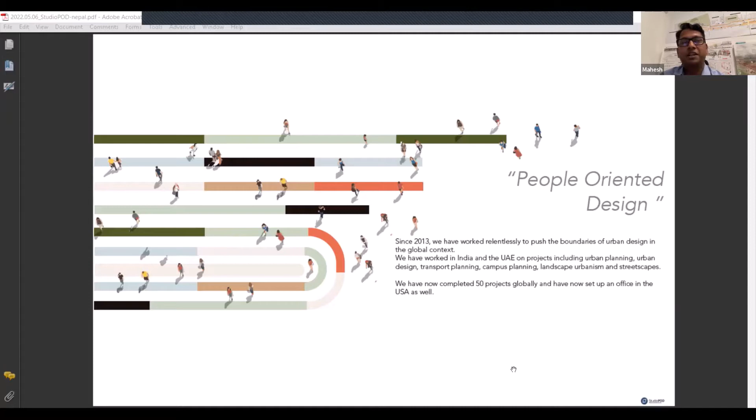We talked about the Western kind of culture of how placemaking and public spaces are being turned around. Specifically for us, like StudioPOD, we call ourselves people-oriented design, that's what POD stands for, and our story has been quite interesting. We are an urban design and planning practice based in Mumbai, and now with an office in the US as well. Our journey has been a learning experience, because all three of us, Sarfaraz, myself, and Mansi, did our masters in the US. We spent 5 to 7 years there, looking at all the stuff Ethan was talking about in terms of New York, the Broadway example, how the entire space transformed over the years.

We've seen that as well. And what Tina was talking about, the child-friendly spaces, a very interesting perspective from what we've seen in the last few years of practice. And what Dr. Sangeeta has been talking about so aptly, in terms of nature-friendly cities. There's also something about looking at history that could really support our understanding of cities, especially in the Asian context.

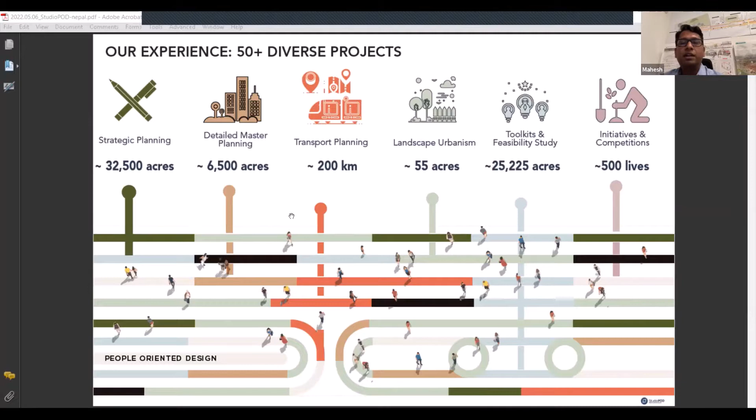So when we started our practice, we had to take everything we were doing and saw in the West, and actually contextualize a lot of our understanding, coming back and seeing the entire experience of looking at different kinds of projects. The idea was to look at the overall perspective from different angles. We went through the whole journey by looking at a lot of planning and master planning exercises, whether old historic towns, temple towns in northern India, villages, and looked at a lot of these city-level interventions that were happening, taking ideas from these different perspectives.

In the last few years, it's been an interesting journey of looking at actual implementation of some of these placemaking initiatives, whether at a large landscape scale integrating with the built form and cities, or actual streetscapes and projects within the cities.

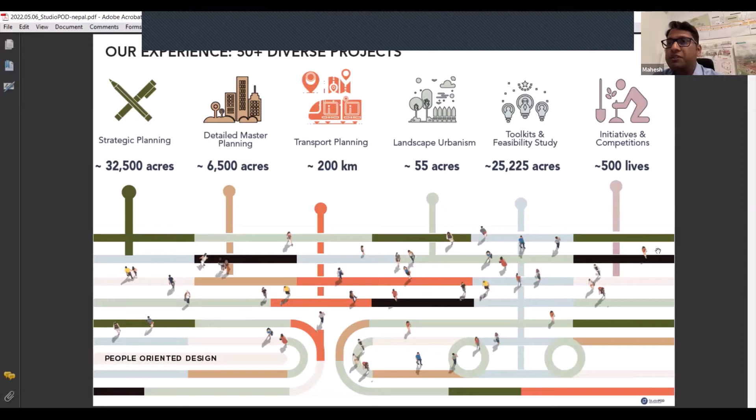So we're going to talk about three interesting projects, each one of us will quickly go through one of them. The first one is Worli Connect. Essentially being a consultancy firm working in the public realm and planning sector, these three projects: one of them is a self-led initiative working with the local municipal corporation. The second one is an appointed project which we took up as an exercise, which Sarfaraz will talk about. The third one is a very different public-private initiative, which Mansi will talk about, the one being mine.

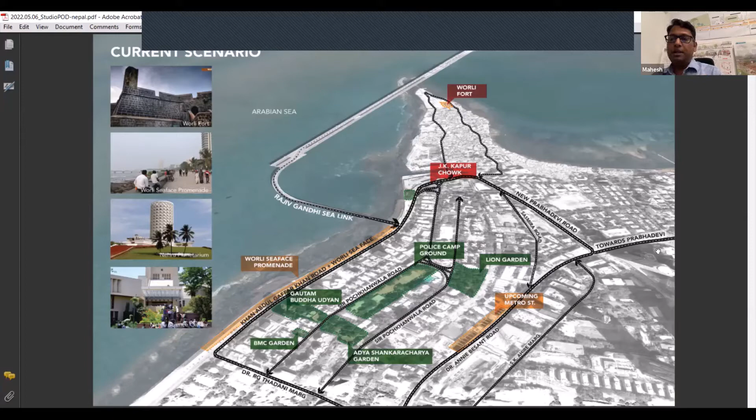To begin with, Worli Connect: when we were working on one of the projects in the city, the municipal authorities called us to just look at one street and public art on that street, for the pedestrian alleyway leading to the coast of Mumbai. When we went and walked around there, we saw so much potential, because that one alleyway was actually part of a larger network within this particular neighborhood. It connected different parks within the neighborhood, and at a larger system level, connected a transit station, an upcoming metro on one side, and the coastline, the sea face promenade, on the other.

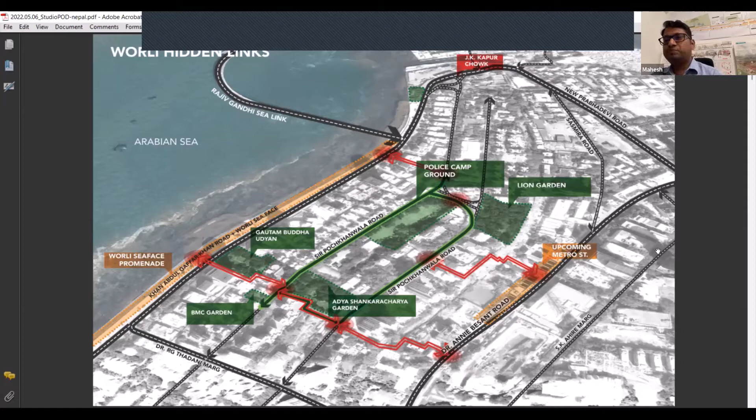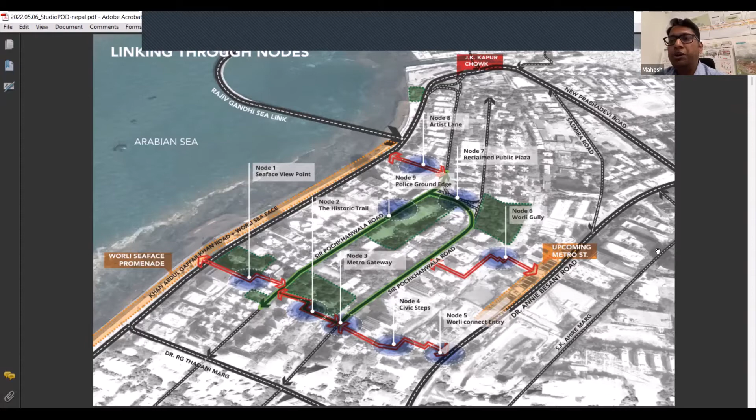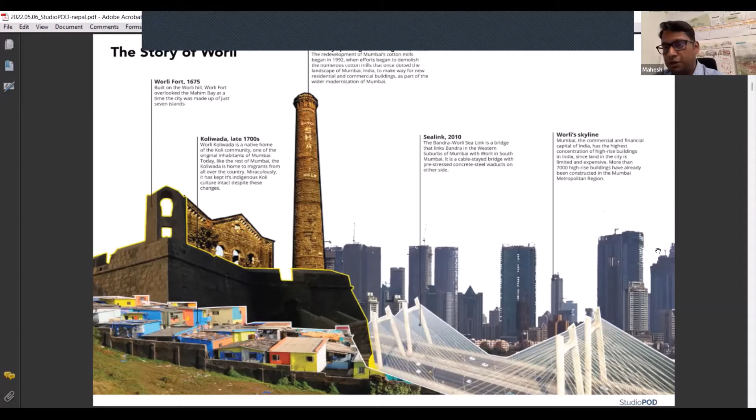So what we really did was look holistically at how to connect all these links together, through a series of fun, loving initiatives of upgrading these public spaces, which were boring pedestrian alleyways, unsafe in a way because of a lot of dark spaces, and how to recreate and use them as public spaces. The idea was to look at the entire neighborhood of Worli, from the historic old fort areas, the transitional mill spaces being redeveloped within the city as new urban parks or corporate parks, and then the future of the place itself.

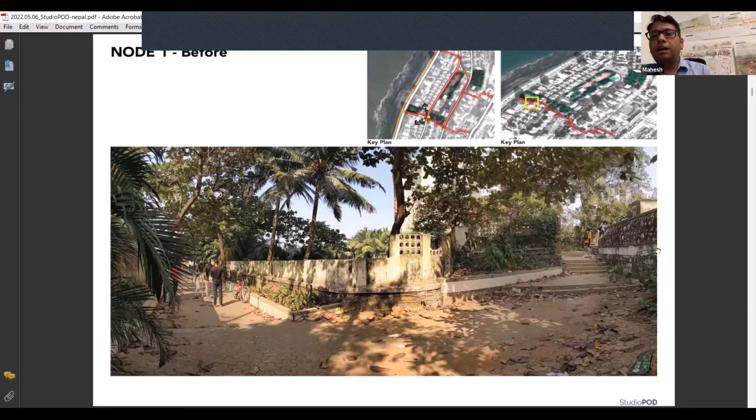Some of these initiatives are still under construction. This basically talks about how you take this one connector and transform it from different perspectives, opening up the wall which opens up the park, and how you look at it as a vision exercise of how to transform these spaces.

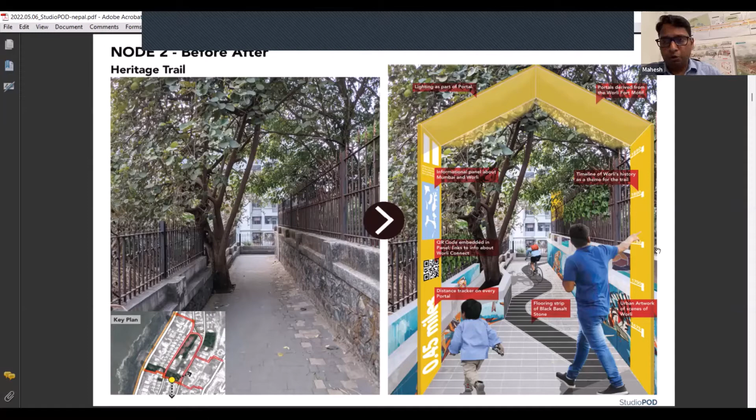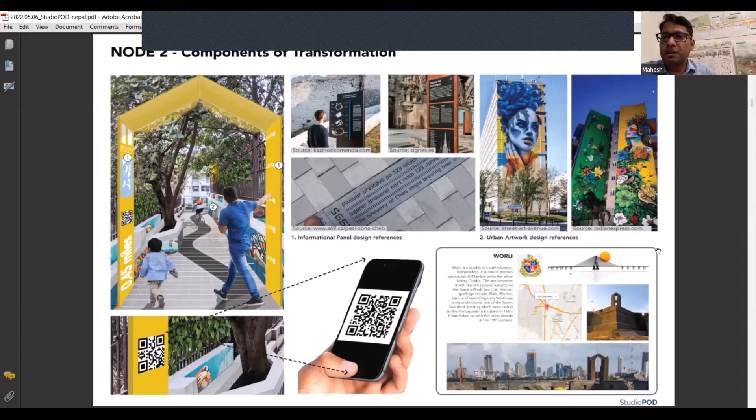Again, talking about the history of the place, and how the entire experience would be much more fun with kids walking through these spaces, introducing play elements along the way, plus wayfinding and signage that could capture local context and history. This was a different exercise for us, because we went in and just showed them the possibility of what could be done.

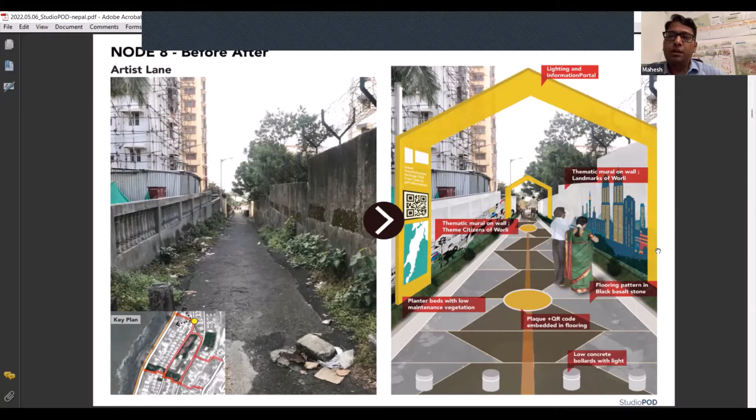It was intensive enough that the corporation authorities told us, okay, let's just try one and see how the transformation happens. We were able to implement one of these nodes, transforming a place that was dark at night into a fun way of introducing light and art, with people coming to interact with the artwork.

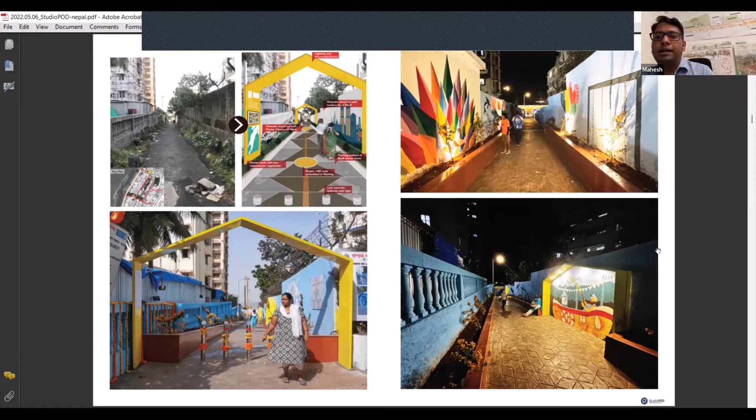The idea of this artwork was talking about the old historic Kolivada, the fishing community and their space. We actually got artists from the local fishing community to come in and do the entire wall art. This was already implemented in a very quick way.

So going to the next one, which Sarfraz can lead in. Then we had all these selfie points, which were very attractive for people of different walks of life. People just walking through would pause and reflect at some of these art points. It's been quite a success, and now we're taking the same idea to different streets throughout the entire neighborhood.

So hey everyone, we'd also like to talk about similar ideas. The earlier version was a quick and dirty approach to transform a place into something lively with lights and color. Whereas there are some projects we were invited to do a mobility plan for walking and cycling.

That kind of traffic was quite a challenge in itself, and what we realized was there was hardly any space. Like all other cities in developing countries, there was hardly any space or thought given to how much space people need, where they'll walk from, how we can create that space. Our biggest win in this project was convincing the local authority through traffic modeling and simulations that we needed this entire lane converted into pedestrian infrastructure.

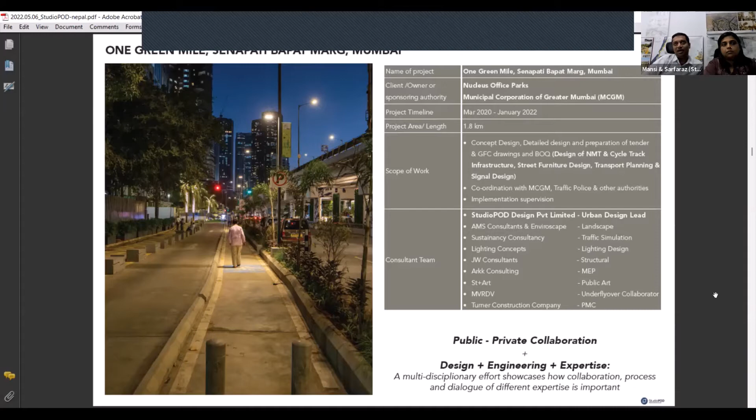So we partnered with them, went to the local communities, went to the local authority, and said let's collaborate on this in a truly PPP model. Several other consultants were appointed, the minister got super excited, and this led to a very interesting process of bringing several stakeholders onto the board.

One of the biggest vision statements that came out of our workshops was that these are not just for cars only — streets are spaces for people. Especially in Mumbai, where we have very little open space, we need more space that can do a lot of different things and multitask. So we went back to the board and asked how we can have an equitable distribution of right-of-way. Think about intersections, walking spaces, play spaces, and art and culture.

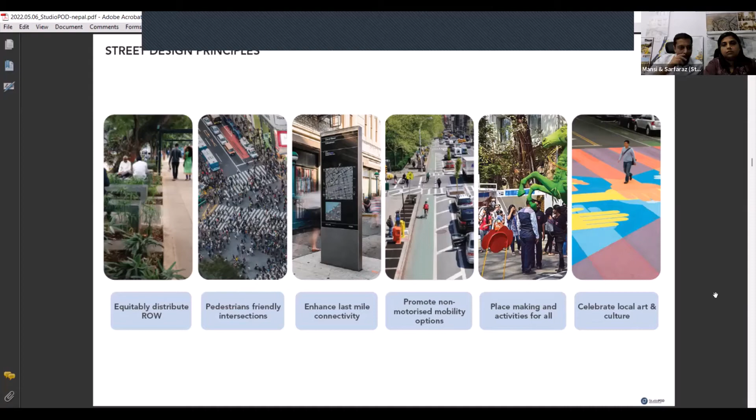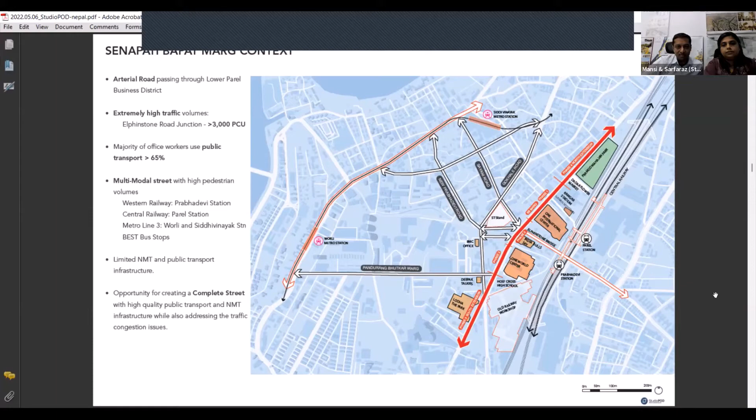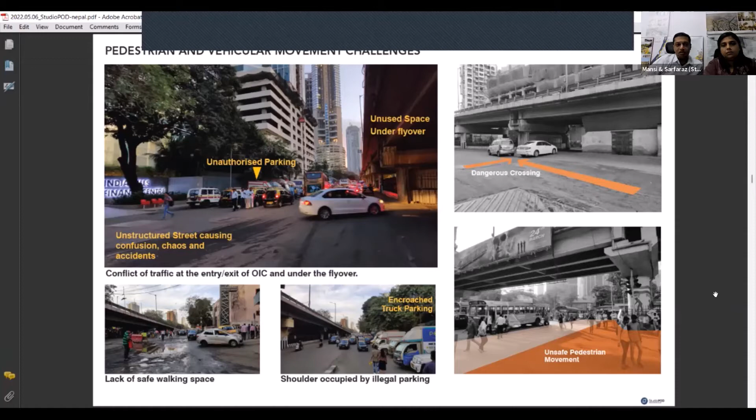Here's what the context looks like. Where it's written Senapati Bapat Marg, that's where the flyover is. So you have this flyover going on top, and these are pictures typical in every part of any developing and emerging economy. It's chaotic, occupied by parking, with no proper drainage and no proper place for walking. Pedestrians are all over because tempos and buses are parked illegally anywhere and everywhere.

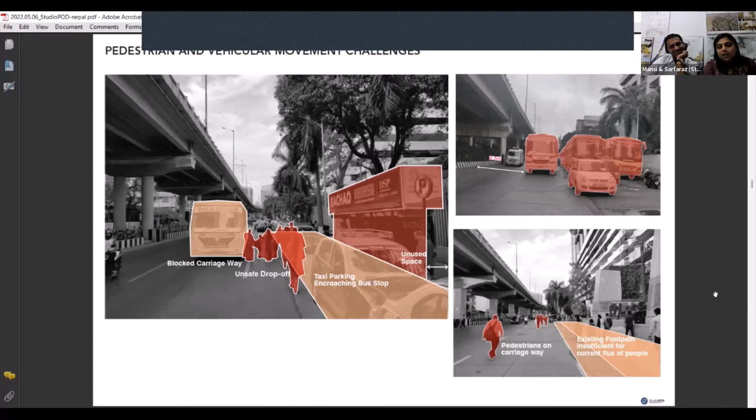At this point, our real challenge was how do we create a space where there is no space? Everyone told us we couldn't do anything here because there's no space, and if we made wider sidewalks, how would the cars go? So how would we create space?

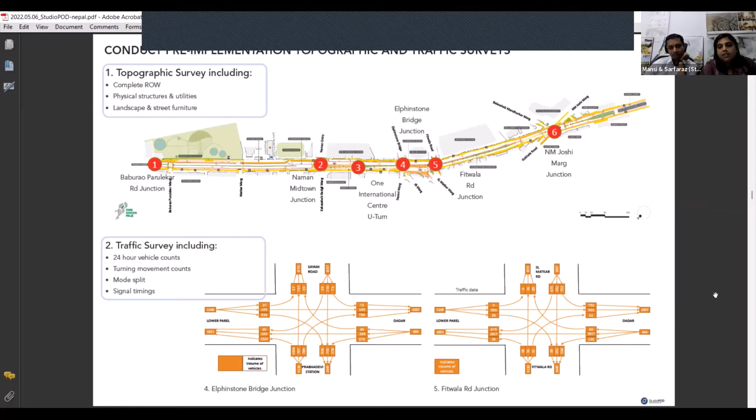We followed a technical as well as a placemaking approach to reclaim space and give it back to people. We did traffic surveys, traffic analysis, and topographic surveys to understand what sort of shoulder spaces were there.

Everybody was very nervous — the government, the client, the consultants — because this is a project in the heart of the city. If you're taking away two lanes from the cars, how are we going to justify all the traffic jams that would follow?

So we followed a mid-implementation process called tactical urbanism trials, where we already showed the vision of the entire design through temporary placeholders and paint, claiming the space and showing the government how it could work. Ultimately the final implementation was taken ahead.

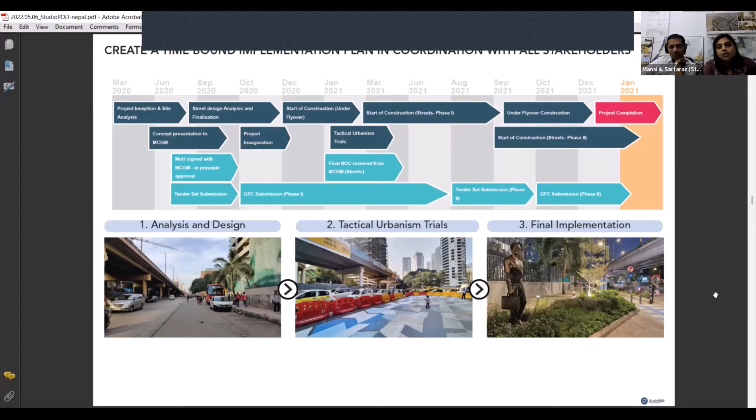It was a two-year process. It was not easy, and it was in the middle of the lockdown. Every time we went out with our masks on, we were going out just for this project.

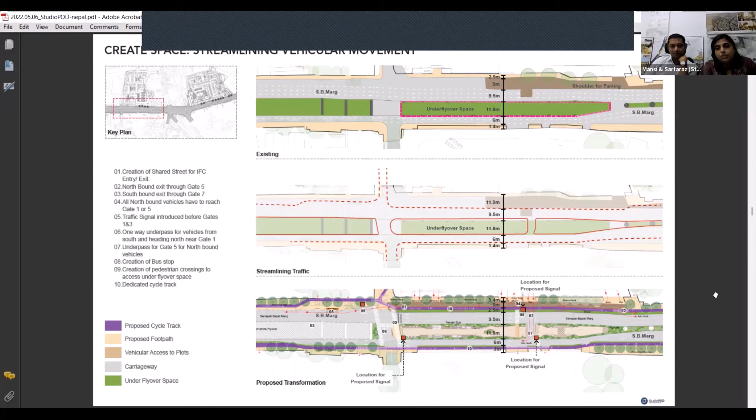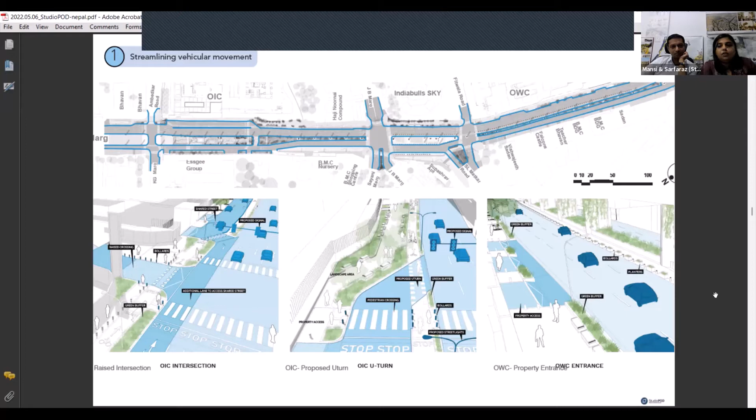These are different aspects — some basic principles so that all the stakeholders, the government, and the people living here were happy. We streamlined vehicular movement, created safe pedestrian crossings, and wherever we could, created islands and spaces for meeting where people can gather.

Benches were actually a struggle because people said if you put benches in front of our building, people will hang around there, and that's something we don't want — it could mean dangerous people would come and hang out. So we had to show them slowly and convince them how benches are a good thing.

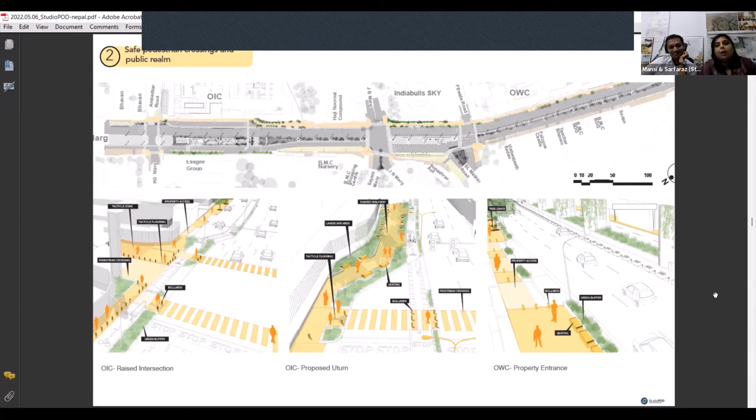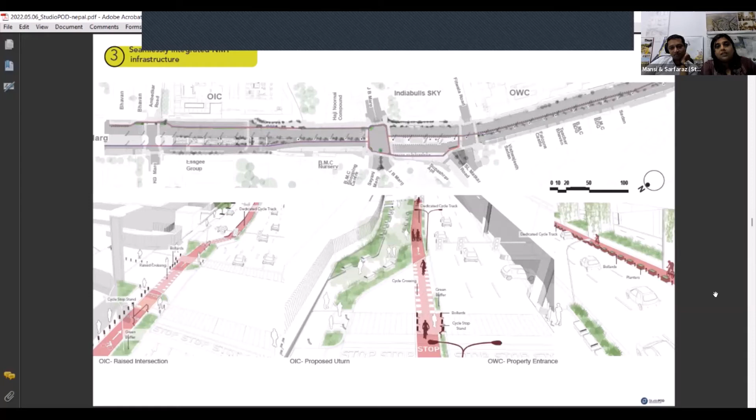Cycling is still being worked on, because the idea was to create a model street that included all different modes of transportation. Cycling was introduced as a network, and this one mile was going to be a pilot to test it out. In the final photographs, this is right now a multi-purpose area — not just used for cycling, but the idea is that the space is reclaimed and kept aside. Once the network is in place, we'll give the space back to cyclists completely dedicated.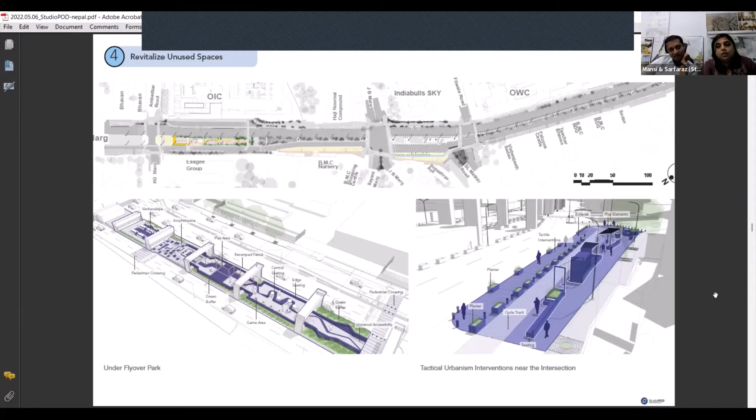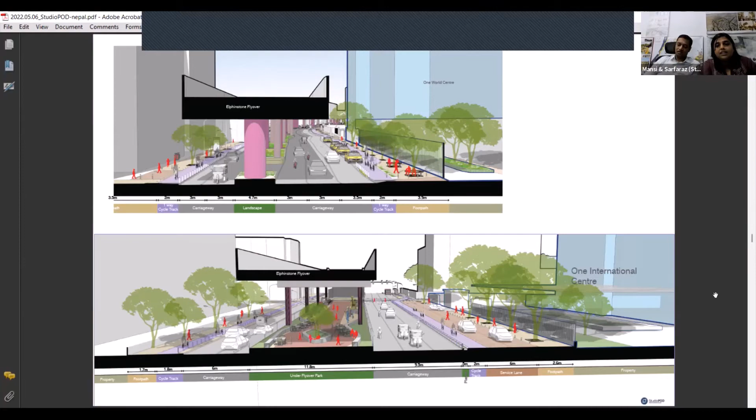A lot of under-flyover spaces were created because we love to fly above everything, all the reality, and we're left with these dead spaces in a city where we don't have enough open spaces or parks — in this case, one of the densest neighborhoods, where up to 5 people live in a room. So we started talking about how children, senior citizens, working professionals, and the local community can use these spaces through different times of day and different programs, integrating that into whatever space we've reclaimed to make it lively and come to life.

So the idea of making an equal street and a place, not just a space, was born. These were some of the initial renders that we did to sort of convince and get everybody on board.

During the day, since we had a full art consultant on board, we curated the artwork as well as the story that is by art, the signage, and everything sort of came into play.

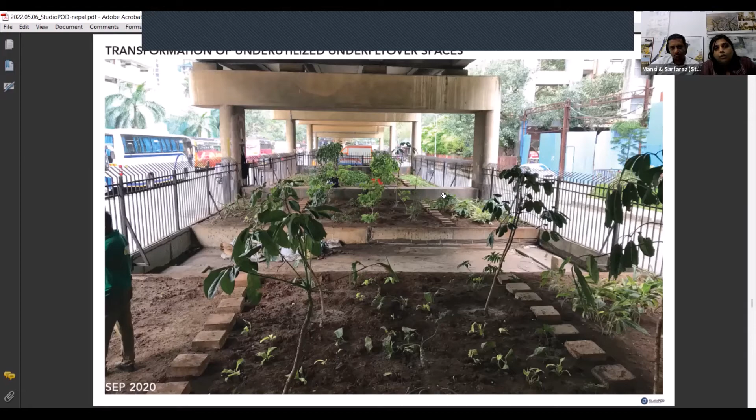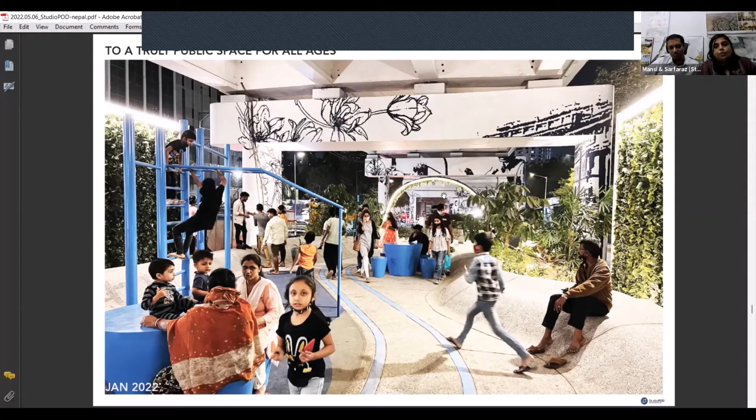What we did was we converted that into a space for the community to come together. It became a park, and lighting became an important piece. The good thing was it was actually raised by a meter, so while it was in the center of the road, when you go there, you do feel like you're a little aloof from everything else.

We had play areas, and today it's completely taken over by kids, taken over by different age groups of people who come and chill here, play board games. There was a Zumba class here, and there were people who were shooting TikTok videos, and all those sort of things are happening here, which is very nice to see.

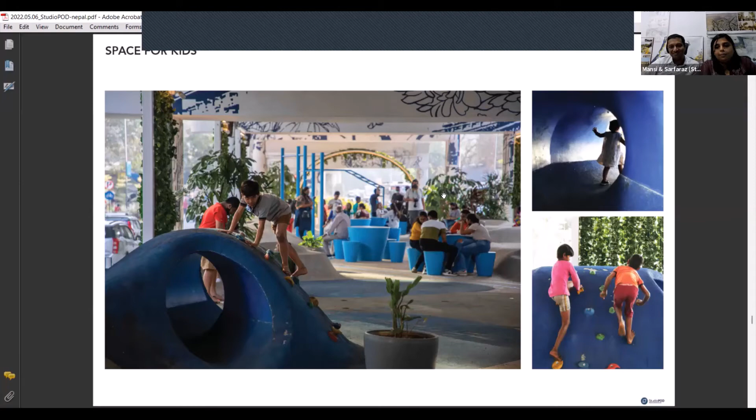So a space which was basically a leftover space under a flyover became a park that actually invites everybody who's walking here to come and walk from the middle of the road. I know it sounds weird to have a park in the middle of the road, but it's actually working.

We also created a program where we went back to the history, and in Mumbai we have Vachanalays. What Vachanalay means, they are study centers. Because the houses are very small, and if 5 people are staying in a house preparing for competitive exams like IES, 10th standard, 12th standard, the kids actually do study under light poles.

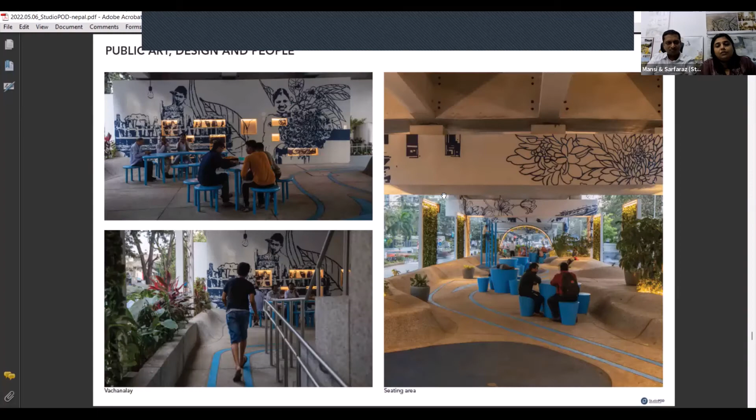Traditionally we had these study centers located along the streets that had 24-hour lights, and that actually allowed for kids to come together, study together, and prepare for very important examinations. That is a program that we introduced again under the flyover, and we called it the Vachanalay, the pictures that you're seeing here. This year we could see that people are actually studying there, which was nice.

Public art became something very important because the art actually talks about the history and the transformation that the space has gone through, from the land of mills to the land of corporate parks, where even the best businessmen want to have their offices here today.

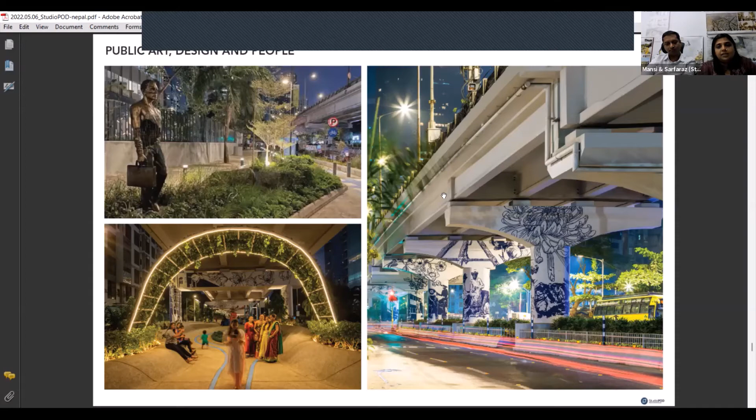So it's really a place that is in this transformation, where you have the old community, but also a whole new set of people who are coming to use it, and how this space allows for everybody to coexist and actually enjoy each other's company.

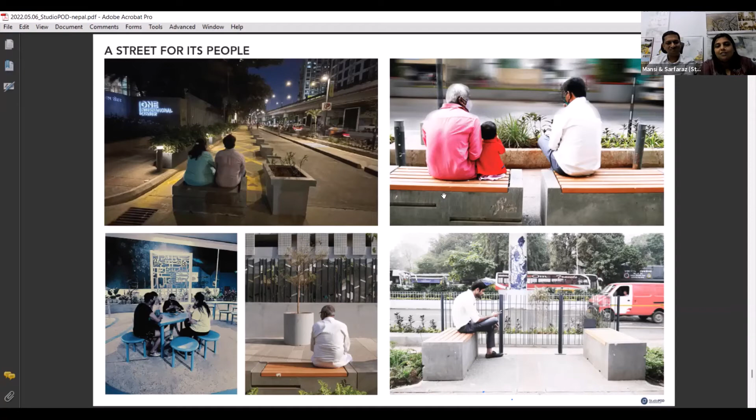So these are just some pictures. We also did the street furniture, like the bus stops. The bus stops were simplified and made into a simple bench. We created signage and wayfinding that allows people to understand where they are, and what different parks have been created. The benches became so good that every time we go there, we started this thing on Instagram called short street stories, where any photograph we click with the benches, you can write a story about it.

And these were some of the wins that we had. We were able to claim 2.3 acres in the heart of Mumbai and give it back for walking, cycling, and landscape.

Pre-implementation, post-implementation, we were able to use an unused space and get almost 2,000 square meters. We were able to plant more than 107 trees, or 120 trees in the end.

So basically, if you all may allow, I'd just like to play a movie. Just one second.

Yeah. Nobody draw, okay? So we're just gonna play this. Hopefully. What happened? Are you able to hear? Did you mute? No. You have to just stop sharing and start sharing. One second. As every good presentation has, we have a technical glitch. One second. Are you able to hear the sound?